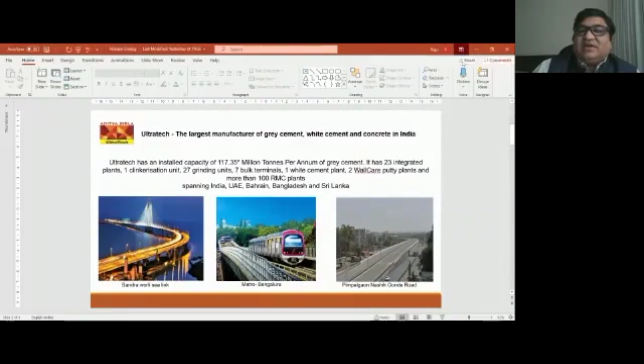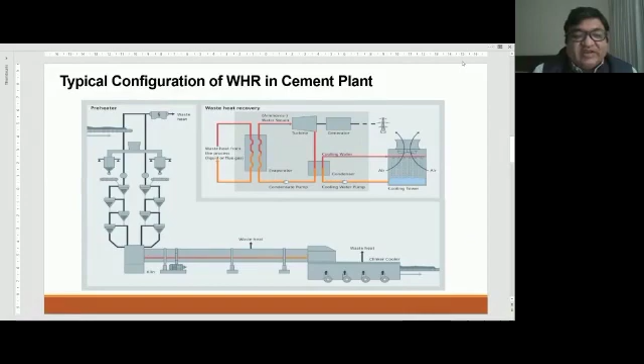Just to give you the background of how the WHR looks in the cement plant. WHR potential in cement plants is the waste energy coming out from the cooler or preheater gases which go out to the atmosphere. With this technology, the gases which we are releasing to the atmosphere from the system are captured through the boiler and converted to energy. So these are the two potential areas for the cement industry, used worldwide, and there are very well known and well established technologies available to use WHR in cement plants.

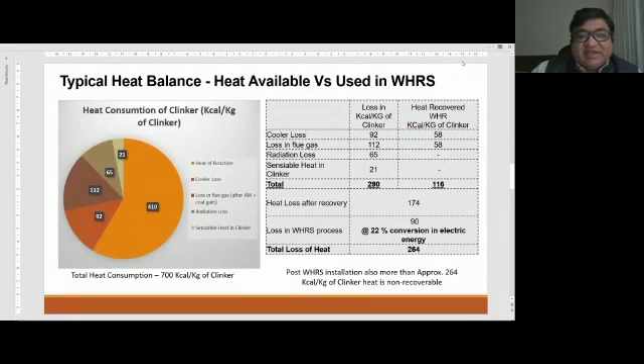What are the best waste gases going out, and how to capture them. This is a very good technical solution, but as we all know, whenever we get some plus points, there are always some negative points. So I will define my challenges in the waste heat recovery system in cement plants in two parts: the operational side of the WHR and the technical challenges of the WHR.

Let's talk about the operational challenges first. As you know, our cement process is a mix of a lot of variables in terms of the raw material, the fuels, the operating conditions, and external factors coming into the process, which create disturbance in our process and fluctuate the temperature. So WHR may not have sufficient or consistent heat available from the cement plant all the time, which also affects the recovery of heat from the waste air.

And also due to the variable operating conditions, because in some places during the 12 months, the rainy season comes, the dry season comes, water requirements change, sometimes too much water in the material, which also changes our operating set points and operating conditions, which also affects the recovery from the waste heat.

Process interruption and stability: as you know, our equipment and our processes are so dependent on external factors. Sometimes due to various reasons, our plants get interrupted or stopped and stability is affected, which also affects the recovery rate of the waste heat from the waste gases.

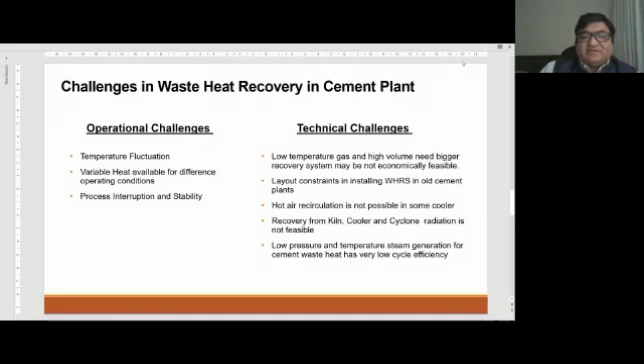And efficiency is getting lower because of various parameters in the process, gases, temperature, and pressures, which affect our whole economics as well as the design, impacting our cost of installation.

Let's talk about the purely process point of view. As we discussed, the waste heat recovery system can be installed in two places in the cement plant, one coming from the preheater side, where the hot gases are released to the atmosphere after the raw mill and coal mill grinding. I will talk about the two sides, preheater as well as the cooler, separately, because they both have different challenges.

So especially on the preheater side, whenever you put in the WHR, it creates additional pressure drop, which requires a significant increase in the air volume, which increases the oxygen level. Your false air especially goes high, which causes some problems in your clinker plant operation, as well as increasing the heat consumption and the power consumption, because you need to drive more air to compensate for that pressure loss.

As we discussed, whenever you increase the oxygen profile, your false air goes up, which can have a negative impact on the process. Plants which have limitations on the preheater fans suffer, because sometimes they cannot maintain the oxygen level, as India is also using quite a significant amount of pet coke with high sulfur, which needs a little more oxygen in the process to produce the clinker.

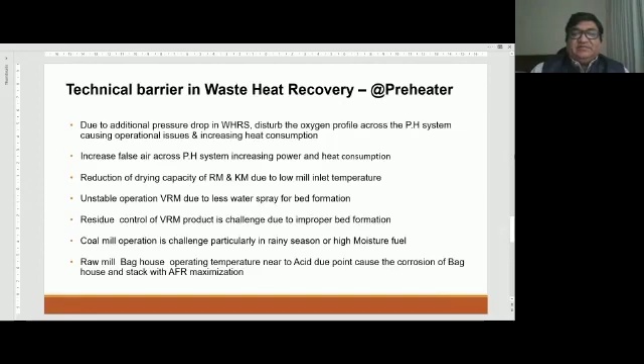Now I'll move to the cooler side. The cooler is one of the areas where maximum power can be generated, because the heat availability in the cooler is quite good. Even though new cooler technologies are installed or replaced in cement plants, there is still sufficient heat available from the cooler exhaust gases, which can be converted to power very significantly and very easily.

Whenever we use the cooler gases for WHR, we face the same problem here, the pressure drop. Your pressure drop increases because you're adding additional resistance to the system, which impacts the power consumption of the cooler section. It can be neutralized because you are generating some power, but you might still see some increase in power consumption, especially on the cooler side.

By putting this cooler, if you understand the cooler, your hot gases recuperation has to be taken by the preheater gases, which is called the clinker gases, and the tertiary and secondary airs, and exhaust gas is also required to vent as well as use the waste heat recovery system. So the three are the customers for the gases coming out from the cooler.

It means your null point, the distribution of the air, becomes very, very challenging: how to maintain that optimum point where your clinker operation in terms of secondary and tertiary air volume as well as temperature can be maintained, and at the same time maximize your power generation from the cooler. I think this needs quite significant operating knowledge as well as operating experience to maintain that null point. Otherwise your clinker gets disturbed and your power generation will also be impacted.

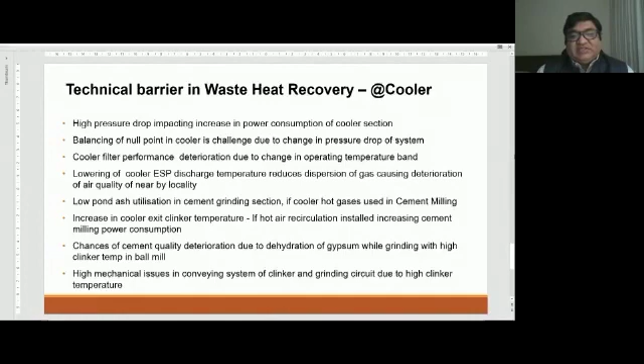By saying all these things, my last point will be: yes, WHR is one of the best technologies for the cement industry to recover energy from waste heat.

In the previous slides, I mentioned a lot of challenges and concerns, but do not think only about the concerns. WHR also provides a lot of advantages. There are challenges, but we have to see the benefit or positive side of the system too.

It contributes to your energy bill, because cement plants, and I'm sure India also has quite significant electricity prices, depending on the source you are using. With TPP, you have a lot of operational costs. With WHR, you save on both cost of operation and power generation. If you take the cost economics, it saves about 20 to 30% of your cost, depending on the size of the WHR and the plant, which is really positive for our cement industry to maintain cost economics and cost leadership.

Most importantly, if you don't have WHR, you might have to use power from the grid or from a TPP. The majority of grid power is generated through coal-fired power plants, and TPP plants are also coal-fired or oil-fired, generating significant CO2 emissions. By using WHR, you can reduce your carbon footprint and CO2 emissions, because the power you substitute is zero CO2 - it comes from hot gases. No fuel is used, so this is called environmentally friendly energy.

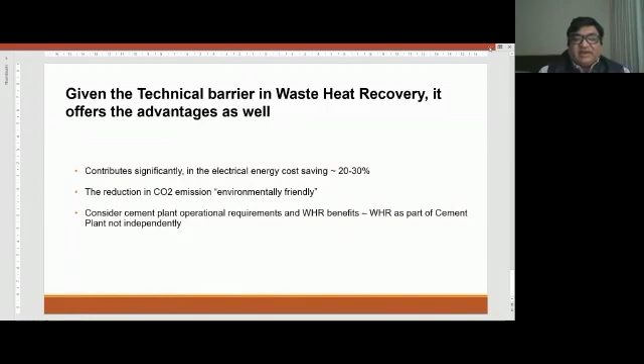So WHR brings a lot of benefit. As we all know, whenever there is some benefit, there's always a challenge. And I think we all in the cement industry are ready to take this technical challenge towards lower CO2 emissions and cost savings, looking at WHR as a part of our cement plant. With this, I would like to say thanks, and if there are any questions, I will be happy to answer them. That is my last slide for the discussion today.

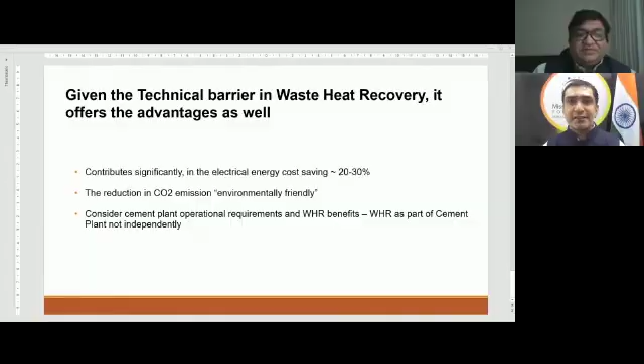Yes, so here we are. It was a very insightful presentation, sharing your thoughts on this important subject. Most importantly, I liked your two points: we always have to think of the WHR plant as one part of the entire plant and not separately. The second part was utilizing your pond ash or wet ash, which is a pretty important thing. The grinding units have to be in place.